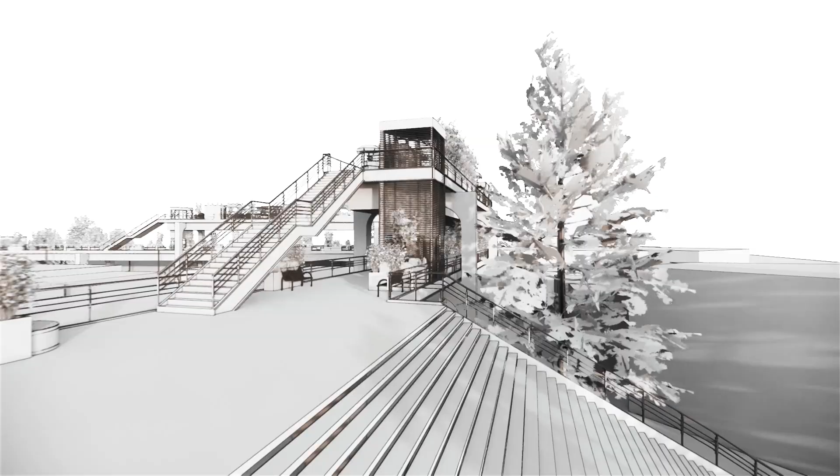Santa Mesa is a home for the lower to middle class communities of Manila. Life in Santa Mesa is busy, yet simple. Being close to a lot of the major developments in Manila, the city has been home for a lot of the working population. Santa Mesa had a lot of history, from being a battleground to one of the significant developing areas in the 60s that helped Manila's rise.

As the capital city grew, slowly, the city of Santa Mesa became less significant. It had become a place of settlement for the local residents of Old Manila, while the center skyrocketed its urban development. The location of the city is one major factor for its sudden change in function. In the old times, Pasig River was the most significant bridge between merchants and traders. As the river got polluted, the city also lost its connection.

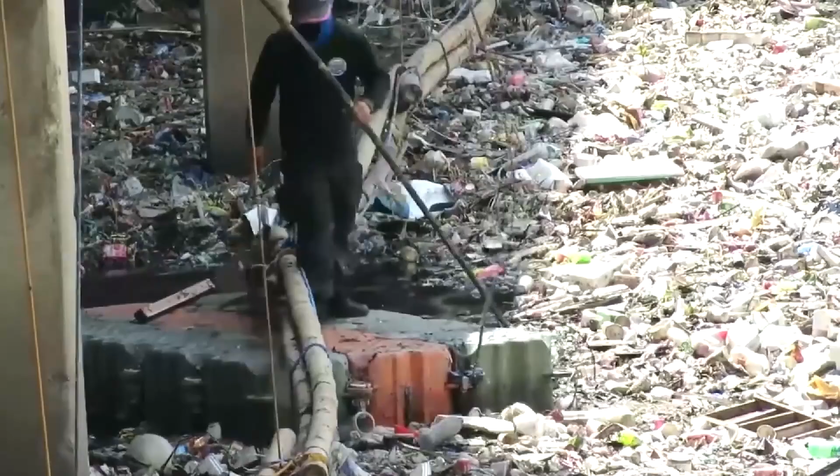Now, the community of Santa Mesa is considered a developing one, with the presence of a major educational institution and the growing number of high-rise commercial buildings in the proximity. The city is moving towards its urban development, and with the growing community, the city also got busier.

Every city has its own featured public landmarks that they are known for. With Santa Mesa, this is Bacood Park. However, it seemed like the small triangular piece of land was slowly losing its significance due to the amount of vehicular traffic surrounding it. Less and less people have been using the park due to lack of activities and unsafe accessibility.

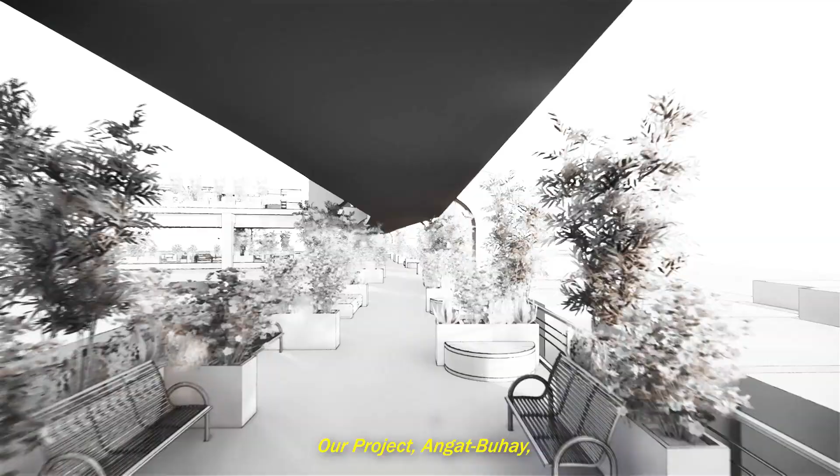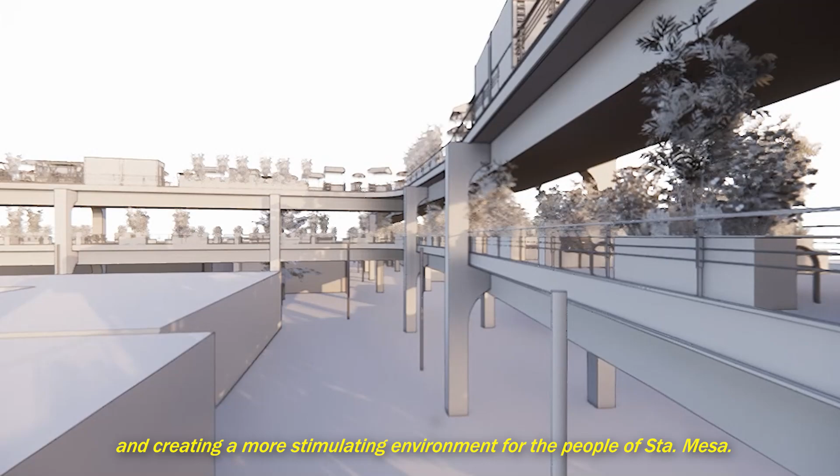Our project ANGAT-BUHAY is a redesign of Bacood Park and its main access points through a multi-level bridge that extends and connects the prominent features of the neighborhood through pedestrian movement, separating it from the busy traffic flow from underneath and creating a more stimulating environment for the people of Santa Mesa.

We intend to create this project as a connected public space for the growing community of Santa Mesa that would also serve a potential center of the city that could attract future developments in the region.

Our conceptual framework revolves around the definition of urban parks and its relation to the variety of people in the community. Urban parks are significant features of city developments. They create an environment of consistent human interaction and connection within the society. It relates the individual private spaces with each other that creates this notion of belonging and inclusivity.

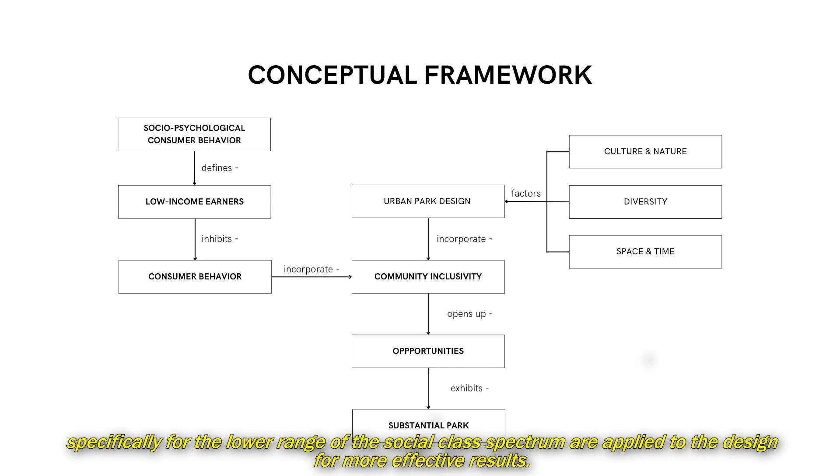Specifically in the case of Santa Mesa, with the people being students and low-income earners, the more common places of interaction are the streets and local markets. As the context of a developing city is also taken into consideration, the objective is slightly geared towards economic development. With this, studies regarding consumer behavior, specifically for the lower range of the social class spectrum, are applied to the design for more effective results.

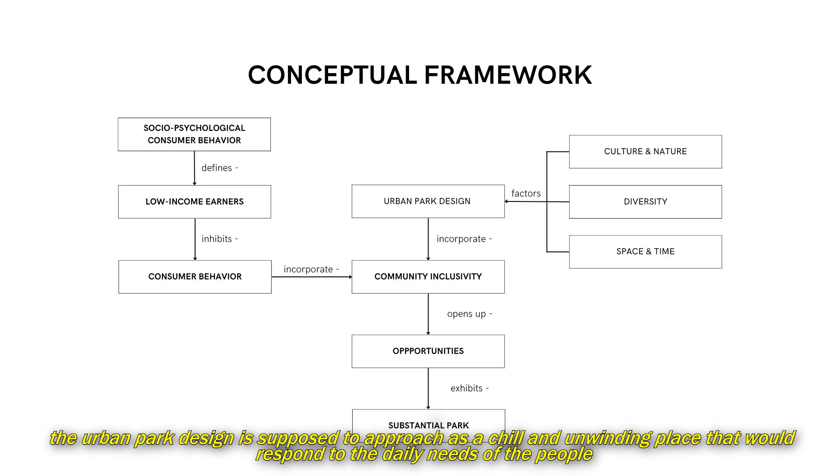In a contextual aspect of creating an urban park, factors such as local culture and matching surrounding elements are also considered along with the classification and identification of the diverse kinds of people in the community. As majority of the people in Santa Mesa are students and members of the working class that undergo a lot of stressful activities every day, the urban park design is supposed to approach as a chill and unwinding place that would respond to the daily needs of the people. In addition, with the constant busy flow of the streets, the urban park should respond accordingly as well. After all these considerations are applied, the urban park can be considered substantial and efficient.

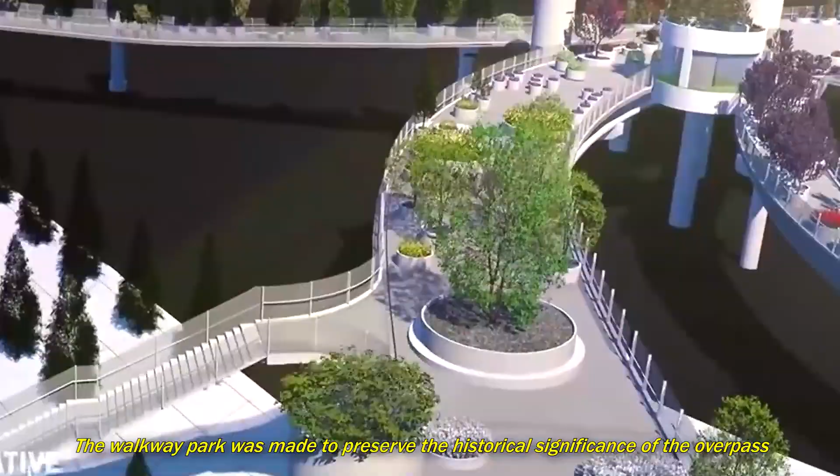From the existing similar urban parks, one precedent comes close to the objectives of our project. The Seoullo 7017 in Seoul, Korea, also known as the Seoul Sky Garden, is an urban redesign project of a former highway overpass. The walkway park was made to preserve the historical significance of the overpass that connected the east and western sides of the city, while creating an environment that would go along with the modernization of the city.

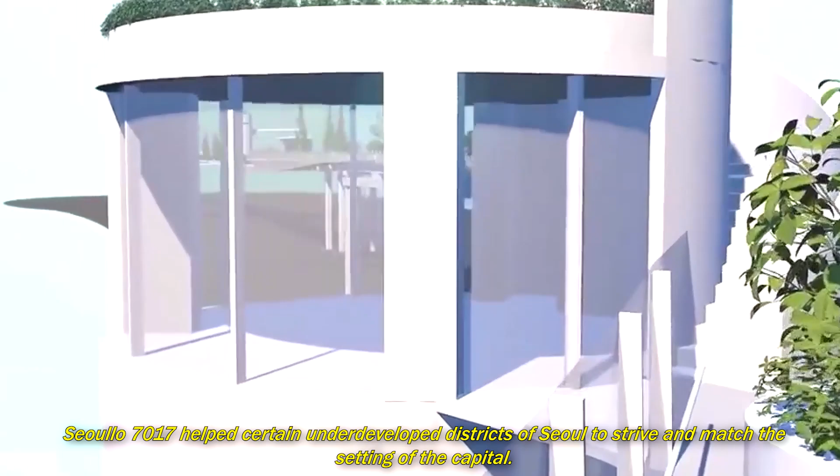Seoullo 7017 helps certain underdeveloped districts of Seoul to strive and match the setting of the capital. This project helped define the necessary elements of urban projects crucial to the underdeveloped parts of the city. Because of the connection that was made from simply improving accessibility, some places could now have a chance to be a part of the urban development from the surrounding areas.

Santa Mesa has the same relation with Manila. The small changes from within the specific parts of the city could drastically affect the flow of progression within and around the city. By prioritizing the smallest members of the community, the pedestrians, we can create windows of opportunities for wider scale developments for the future.

Summarizing our ideas and goals, here is our project statement. Redesigning and expanding the existing Bacood Park can address low-income stakeholders by creating an elevated space that can provide an accessible area for both business owners and consumers. This ensures that the park will give them the safety, opportunity, and inclusion that they need.

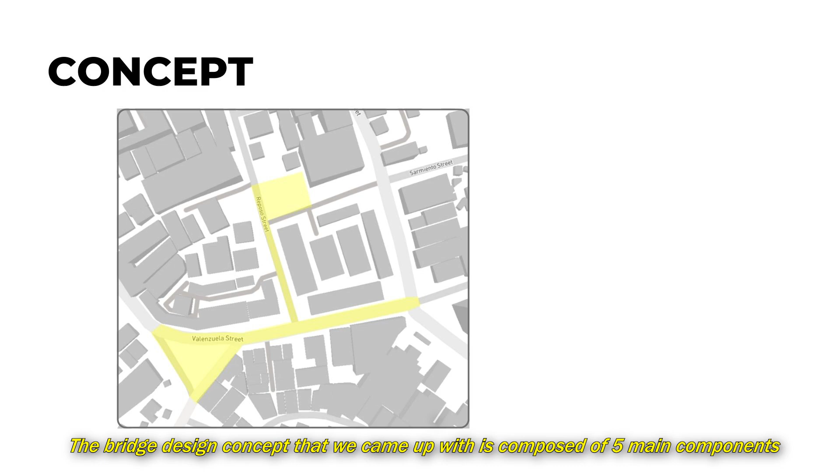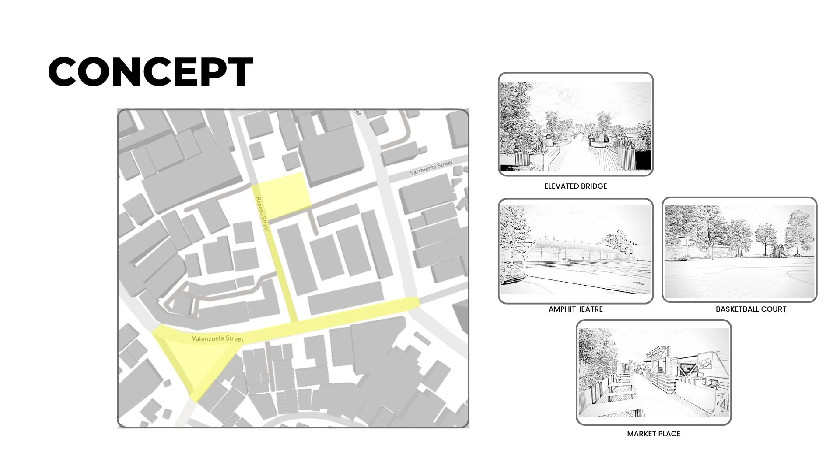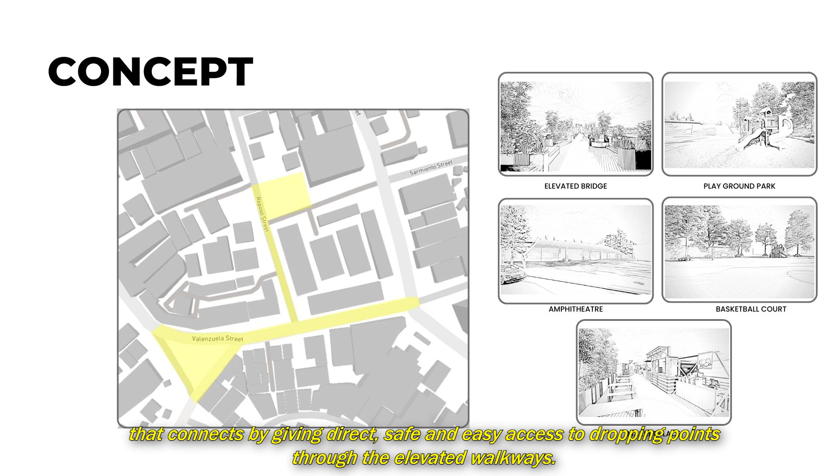The bridge design concept that we came up with is composed of 5 main parts: the 2-floor elevated walkway bridge, the amphitheater, the marketplace, the basketball court, and an open park, which is based on how we want the users to use the space to create an open community that connects by giving direct, safe, and easy access to dropping points through the elevated walkways.

When creating the form of the bridge, we trace the line of the road or the street circulation of the area to generate a bridge to make a connection from a line to point on both ends.

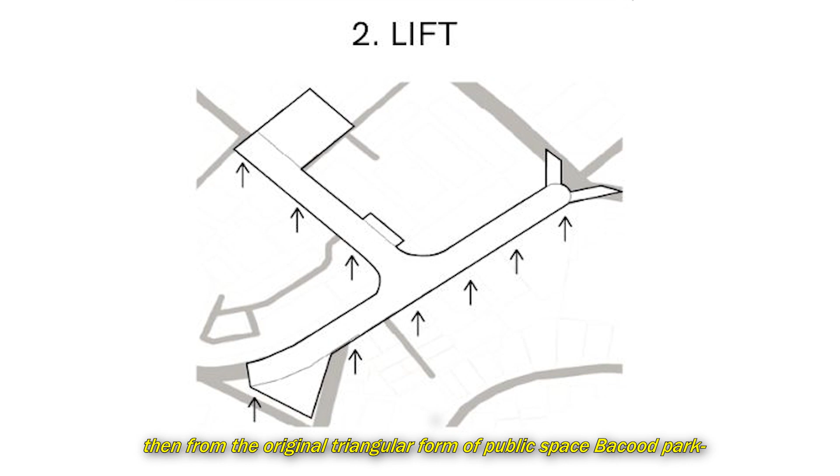Then from the original triangular form of the public space, Bacood Park, we transformed it into an amphitheater to be the main access point to the elevated bridgeways.

The bridge is formed and built to give direct and safe access to people towards their destinations, while the top level will serve as a marketplace to keep the area active during the daytime and nighttime.

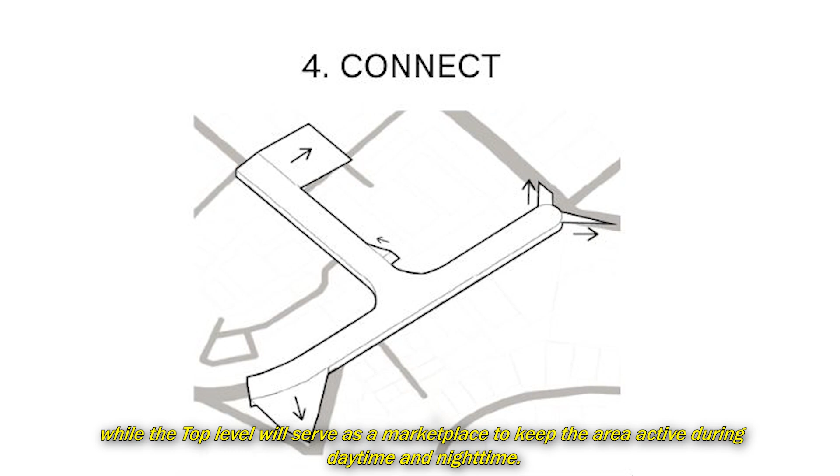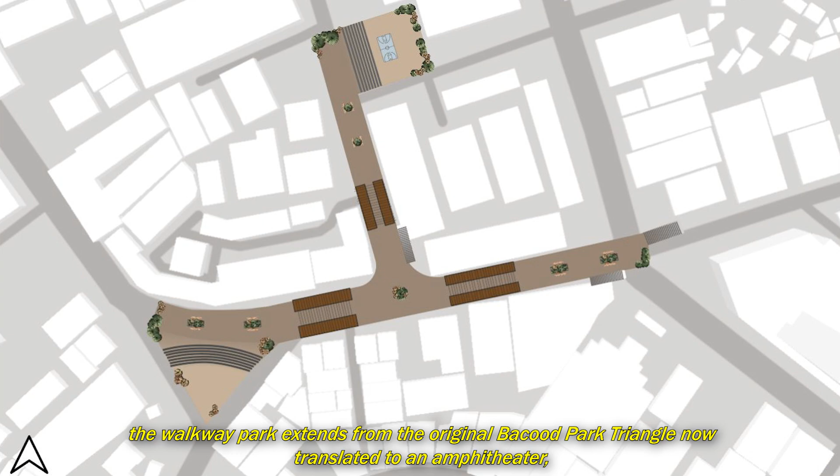After the series of arrangements and changes in accordance with the surrounding elements of the area, we have this form. As we can see from the site development plan, the walkway park extends from the original Bacood Park triangle, now translated to an amphitheater, from the school in the north, and branching out on the residential blocks in the proximity.

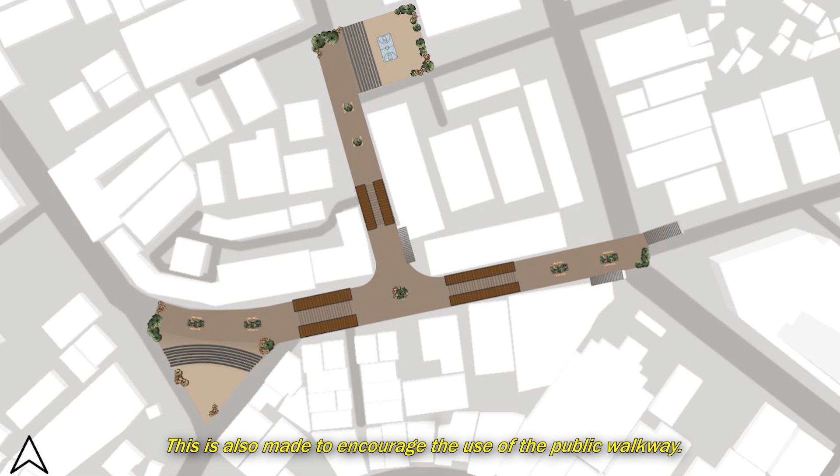In order to create a smooth flow of pedestrian movement, multiple access points from the major streets within the vicinity are provided. This is also made to encourage the use of the public walkway.

Moving on to the different sectors of the project. First, we have the amphitheater.

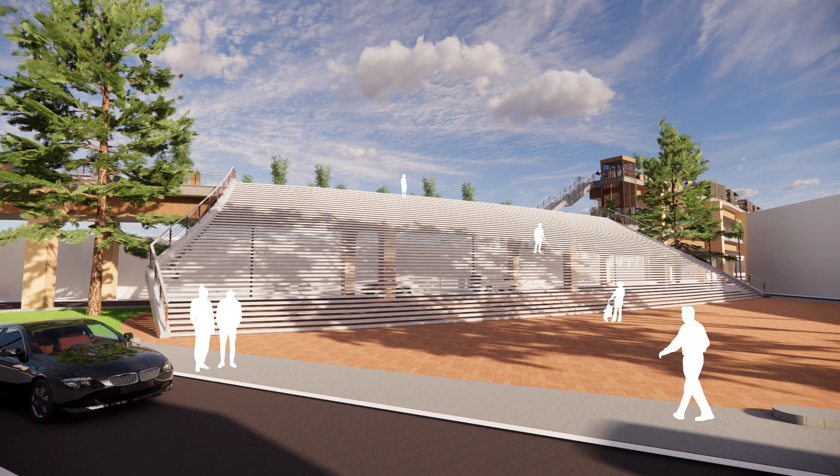The amphitheater is what replaces the old triangle of Bacolod Park. This space is meant to be used for the major community events and gatherings, as it is at the center of the key elements of the city.

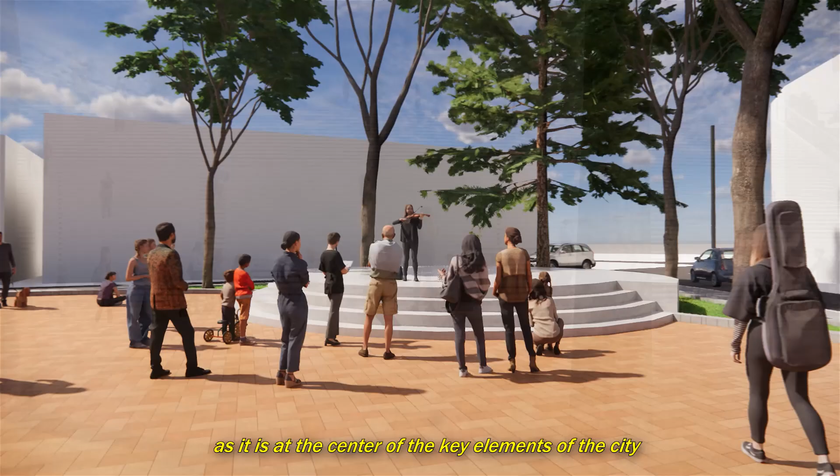This space also doubles as a grand staircase that would give the silhouette of the landmark. The open grounds are well emphasized with a different floor tile pattern to distinguish it from the sidewalks. Natural elements like the trees will be kept as it is from the original state.

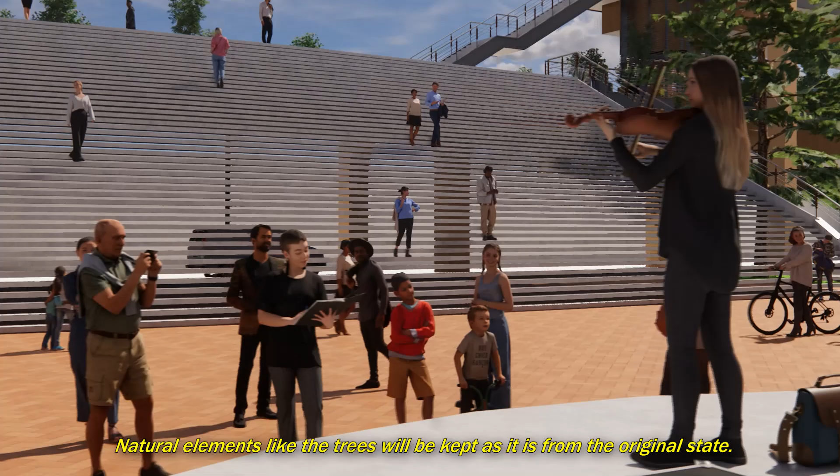Next, we have the Bridge Park. The Bridge Park serves both as a pedestrian walkway and tambayan.

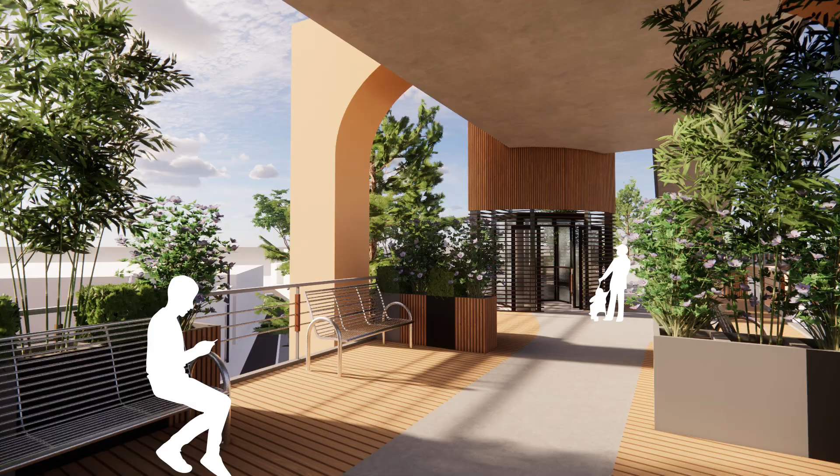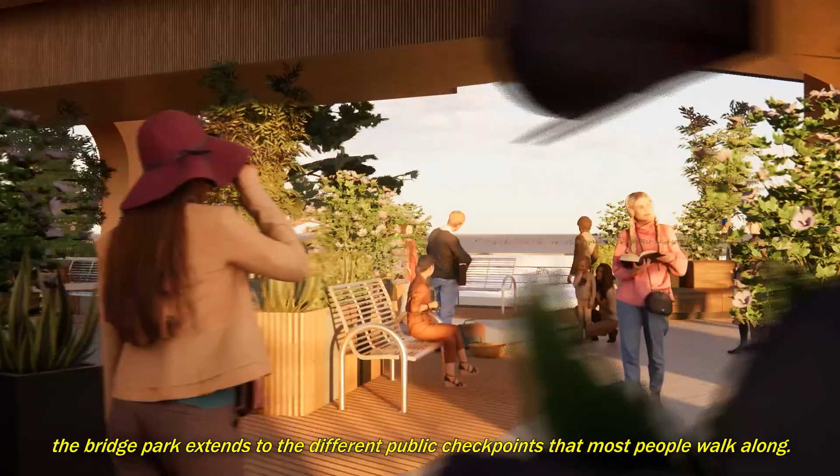In order to promote a walkable community, the Bridge Park extends to the different public checkpoints that most people walk along. In order to address the fast-paced, stressing environment from the schools and workplaces, and the lack of life in the looks of the concrete residential blocks, the bridge is designed with local green spots.

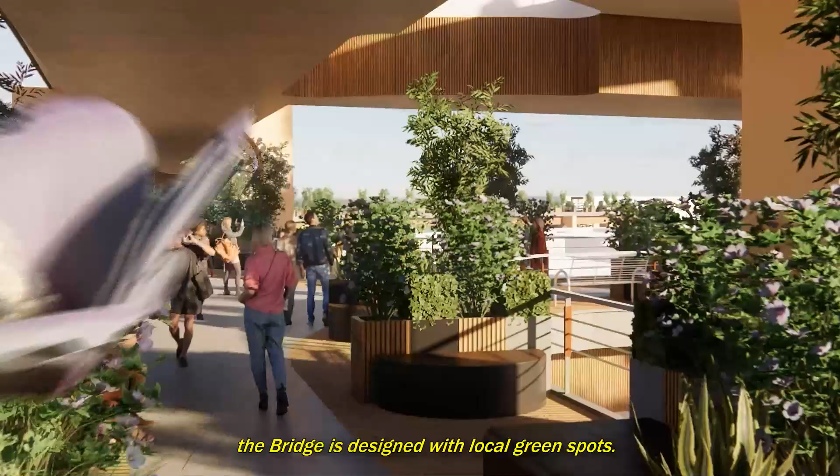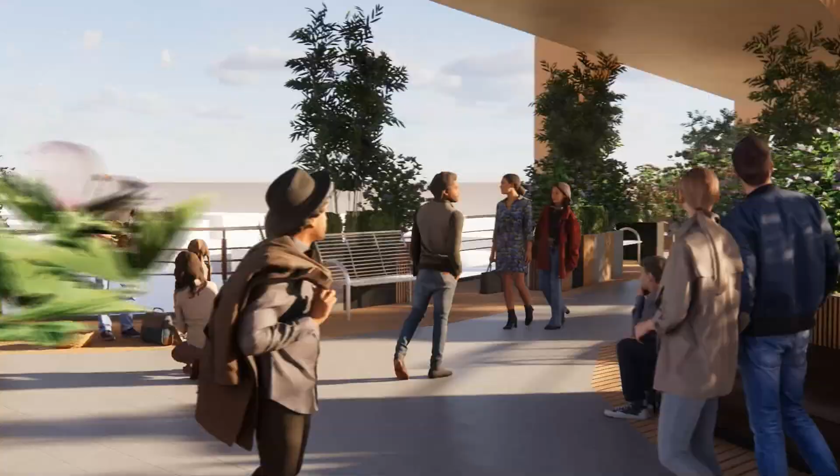This is also made to promote a natural-looking and natural-feeling ambience, especially due to the fact that the surroundings are already polluted. Another interesting feature from the Bridge Park is the use of kinetic walkable paths that help generate electric energy that helps sustain the lights and minor facilities of the walkway.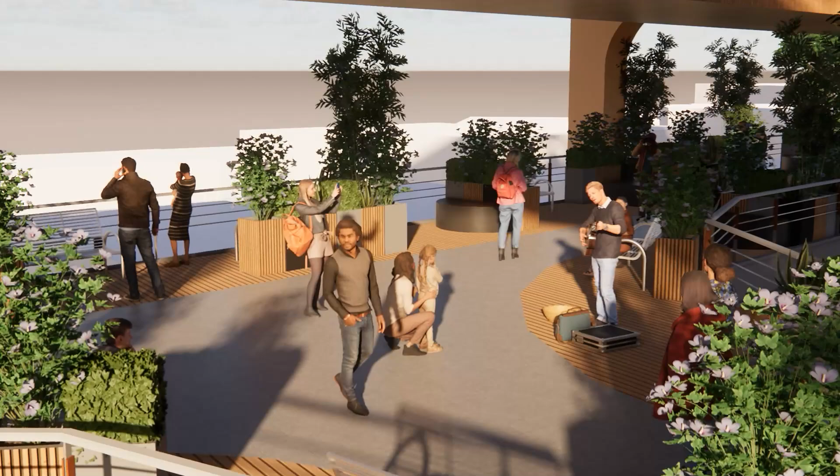For the third main feature, on the uppermost level of the walkway park, we have the marketplace.

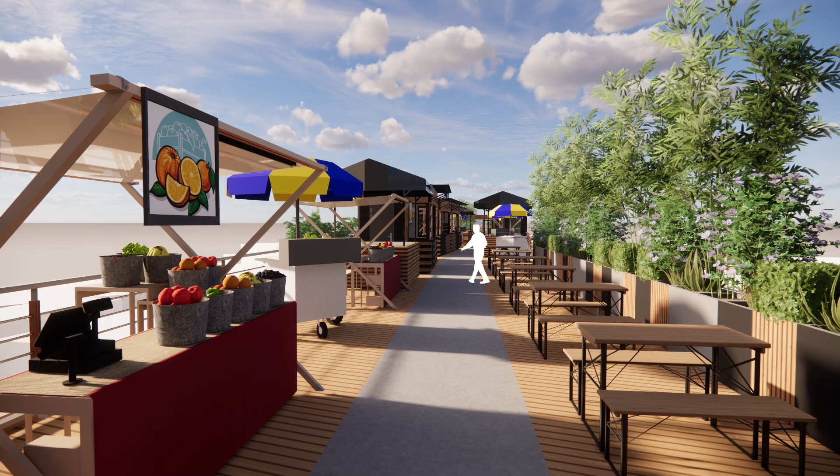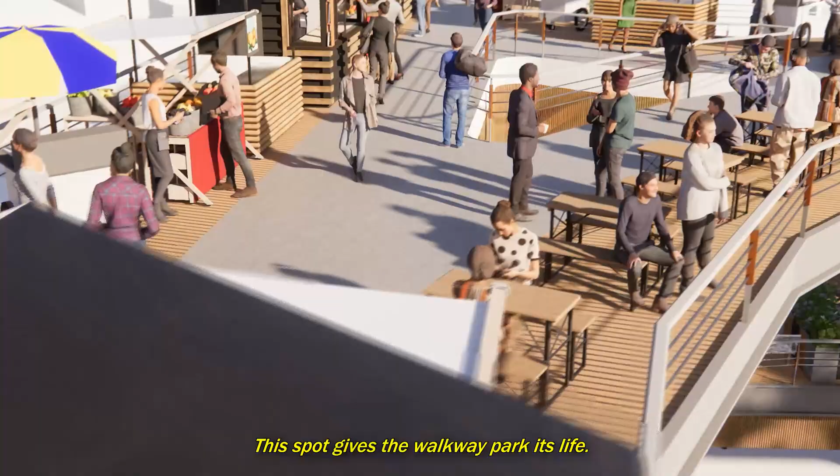The spot gives the walkway park its life. Marketplaces are naturally brimming with social interaction, and this area is no different. From food stalls to local shops, the upper level becomes a typical street market made for the masses.

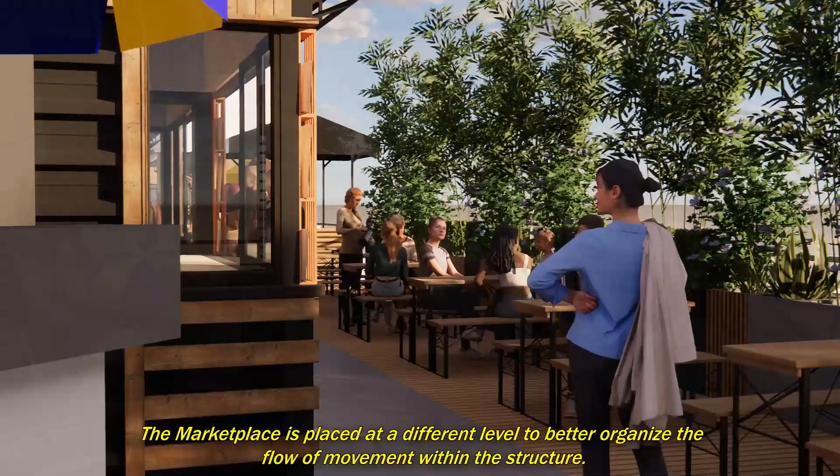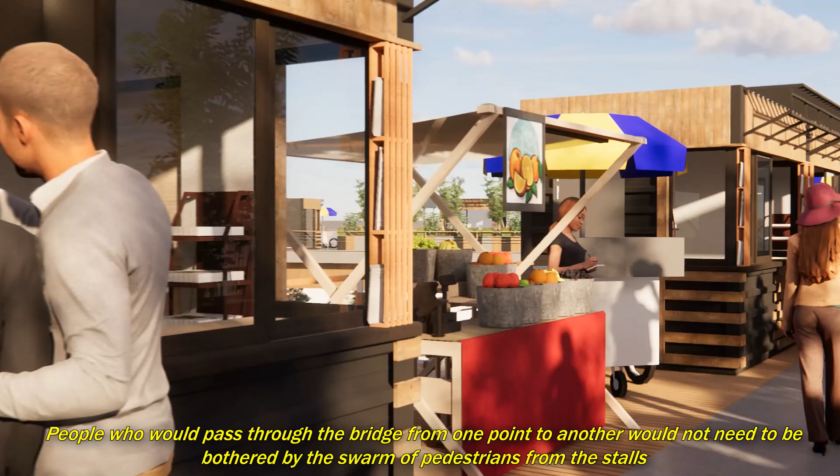The marketplace is placed at a different level to better organize the flow of movement within the structure. People who would pass through the bridge from one point to another would not need to be bothered by the swarm of pedestrians from the stalls, and the people enjoying their time can have their own space designated for them, while still feeling the overlooking view of the surroundings.

At one end of the walkway is a recreational park.

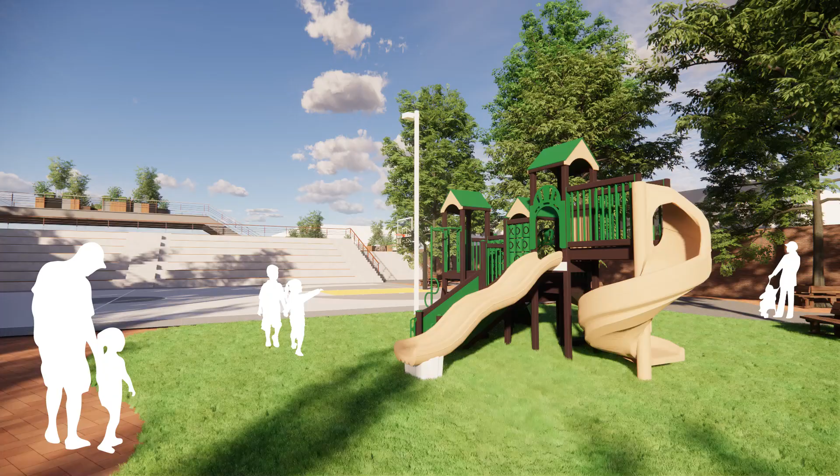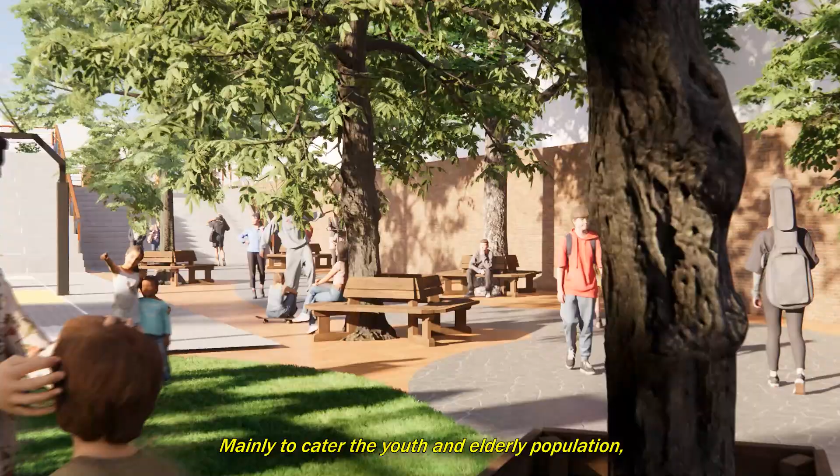Mainly to cater to the youth and elderly population, the recreational park, based from the original Bacood Park layout, is kept present and placed on a more accessible area for the local residents.

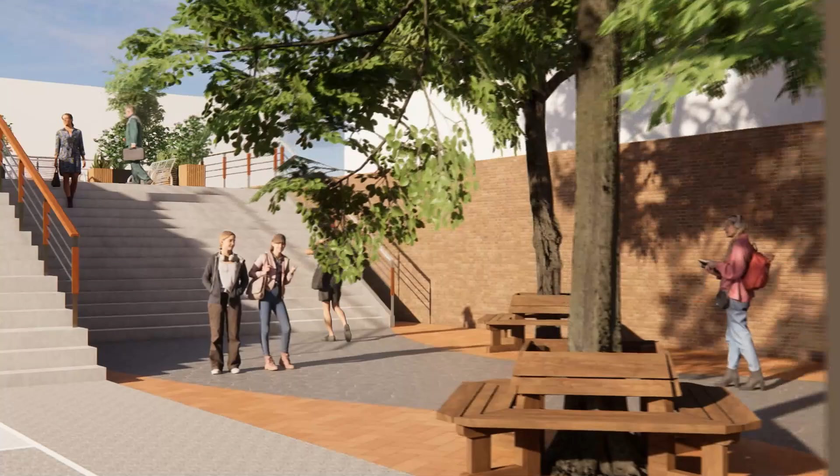As much as we wanted to redevelop and redesign the area, there will be people who would prefer the typical park feeling of playgrounds and just a simple natural environment.

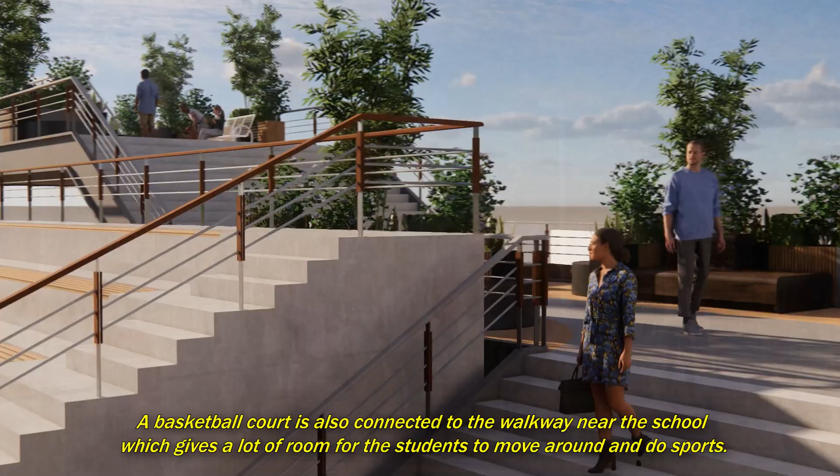A basketball court is also connected to the walkway near the school, which gives a lot of room for the students to move around and do sports.

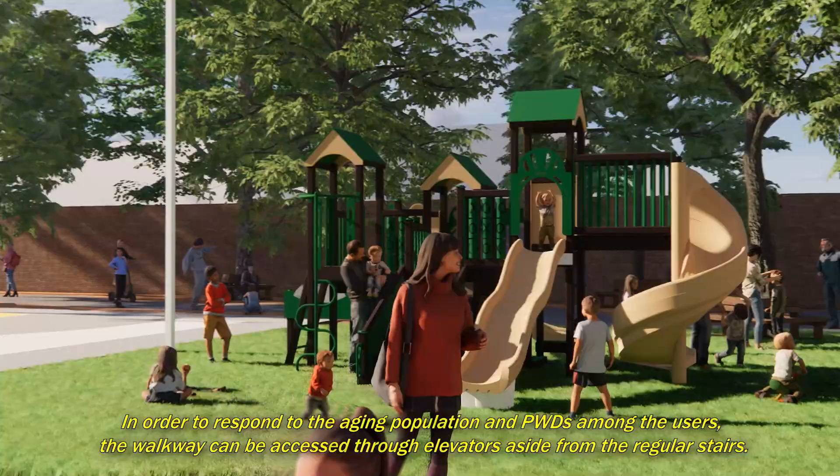In order to respond to the aging population and PWDs among the users, the walkway can be accessed through elevators aside from the regular stairs.

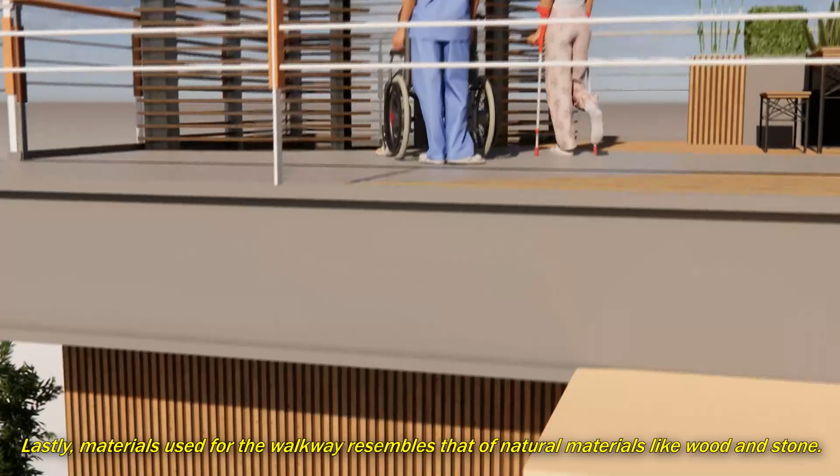Lastly, materials used for the walkway resemble that of natural materials like wood and stone. This is done to provide a subtle look to contrast the massive superstructure that covers the street of Santa Mesa.

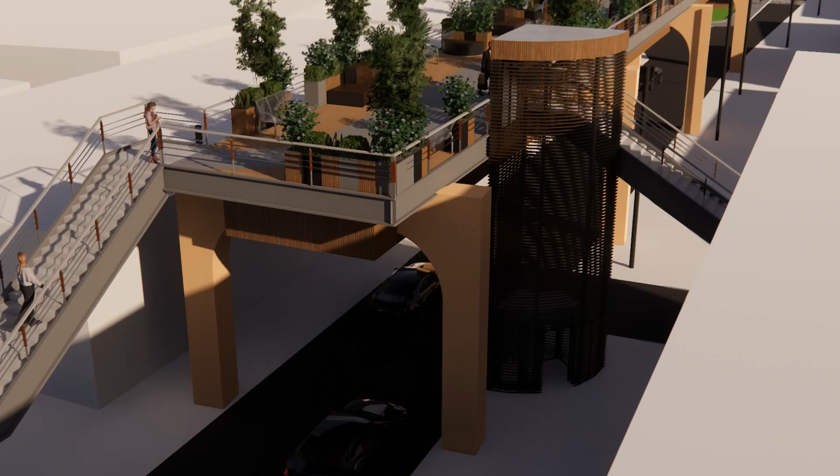Some spots also apply translucent materials in order to keep light pass through underneath and maintain natural light along the street level.

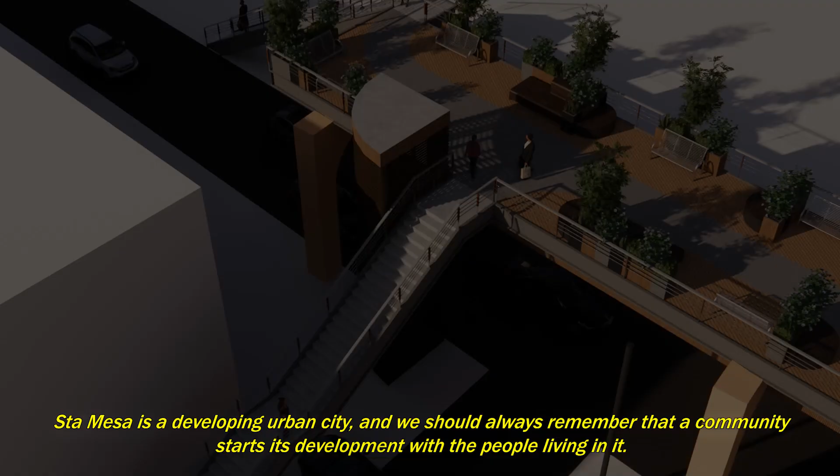Santa Mesa is a developing urban city, and we should always remember that a community starts its development with the people living in it. From the people of the past, our elders, we preserve their legacy and culture.

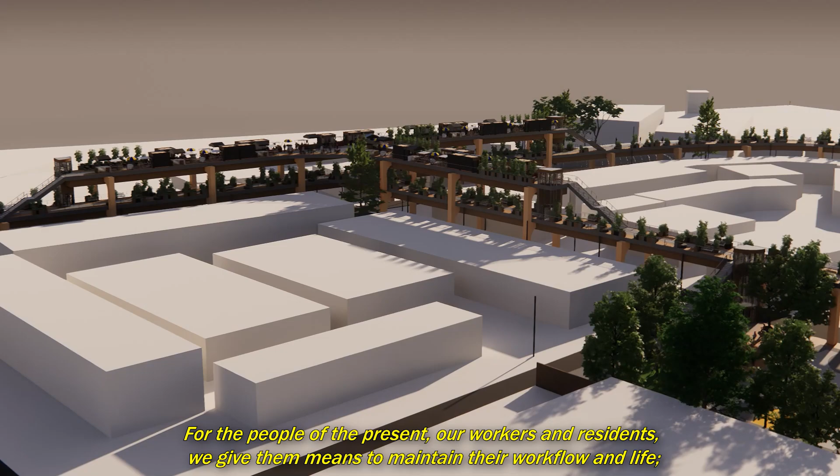For the people of the present, our workers and residents, we give them means to maintain their workflow and life. And for the people of the future, the youth, we give them a better life by allowing opportunities to rise from all around them.

From how the developments of urban projects in the Philippines are, especially in the capital, most establishments cater to the already developed business districts. We forget that the small communities we have are also part of these developments.

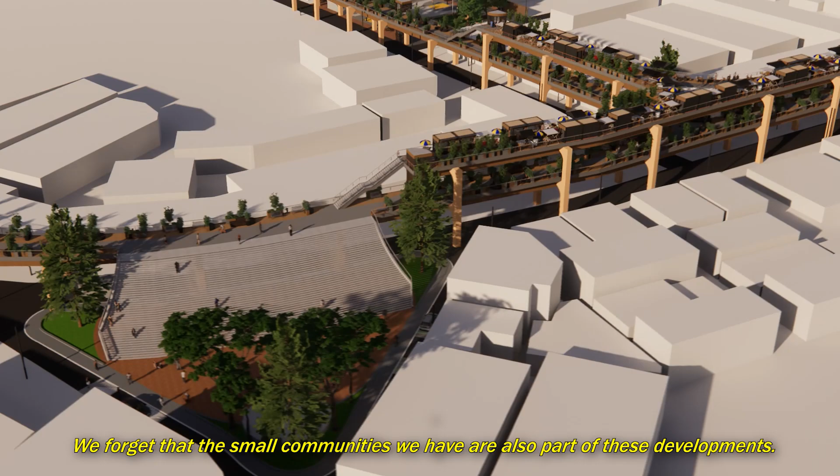ANGAT-BUHAY, which also translates to Rise in Life, is a project that not only builds buildings, but also builds life.